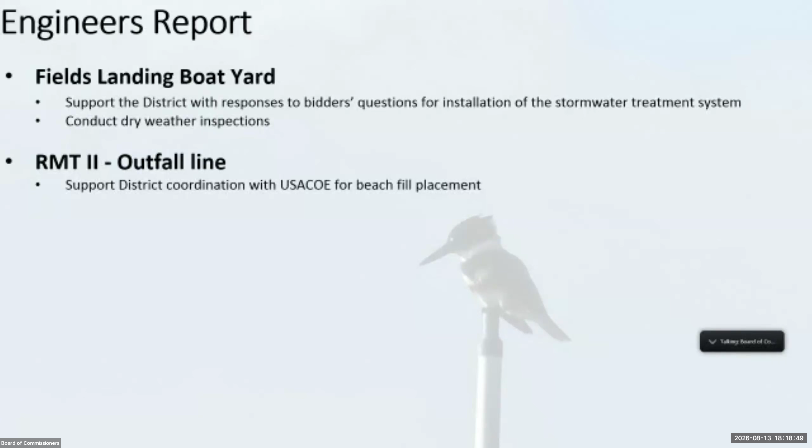And that material is sand. It's been found suitable for beneficial reuse and placement. So we've been working on a project with the Corps to see how we can use more of that material and perhaps consider direct beach placement. So more to come on that in the future. We're getting there. We're having a little technical bit here. There we go. RMT2 firewater.

So we're looking at alternatives for providing firewater flows out to the mill. You'll remember back, well, some of you will anyhow. Back in 2019, not all of you were on the commission back then. The state fire marshal had come to the area and said, "Hey, look, we need fire water on the Samoa Peninsula. We did not have fire water." And so we came up with a way to repressurize the system that was out there and expand services from Redwood Terminal 2 all the way up to the town of Samoa. Well, that is no longer necessary with the development in Samoa because they have their own water storage.

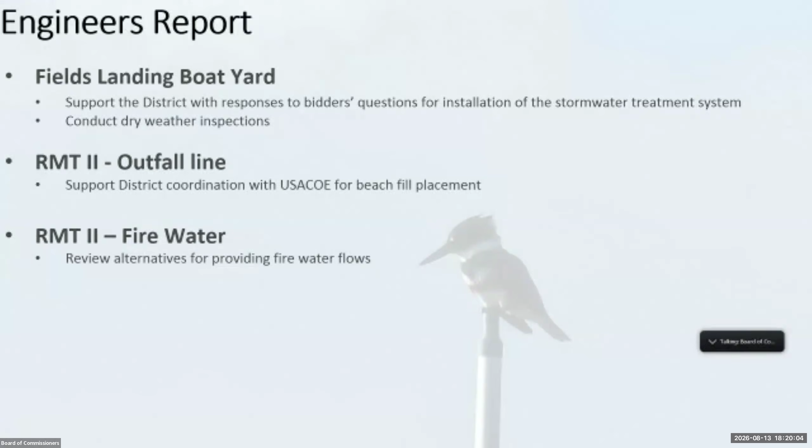The infrastructure that we were using for supply is failing faster than we can repair it due to its age. And so we're looking at alternatives to replace the current water tank, which is about 100,000 gallons. It's an elevated tower tank. That's one of the landmarks many people see out there. And we'd replace it with a ground level surface tank with a flow switch and electric pump to keep our fire system pressurized at Redwood Terminal 2.

Former LP Samoa solid waste site. So this is really just groundwater monitoring around the Samoa ash dump. And each year we have 2 monitoring sessions. We have an upcoming sampling session in August. Those numbers continue to look very good. We continue to stay in our post-closure status.

Shelter Cove, we recently received FEMA funding for the road. I don't know if I'm too far away tonight or why this mouse isn't working. We've been coordinating with Cal OES for boat launch access for road repairs. There's 3 repairs. There's the rebuilding of the breakwater. There's the road repairs. And then finally, there's a large scale debris removal project that we hoped would go first. So far, only the road has been funded. We received that funding just this past week. So we're working with SHN to see how we can commence studies and permitting there, and then ultimately move that project to construction.

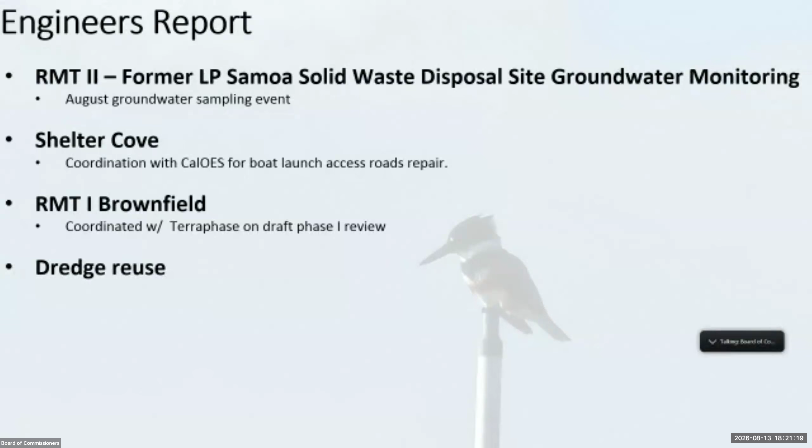Finally, RMT1 Brownfield, as part of the heavy lift main terminal, but outside of that, we had received funding to support the cleanup of the former Redwood Marine Terminal 1 and some neighboring properties for those landowners that have consented to be a part of it. We recently received the draft phase ones. They're in the review process to be finalized. They can be shared with the agencies and our technical committee to move towards the sampling and analysis plan.

And dredge reuse, we have a beneficial dredge reuse conference coming up that Rob was spearheading, and now we have Shelley from Moffatt & Nichol spearheading for us. That'll be coming up in October, and so Mike is helping support that and be part of that conference. And Vanessa's here to offer her report. It's pretty quick.

Just ongoing permit processing for Harbor District permit renewals, and then also received word that the Coastal Commission has accepted for filing as complete the renewal for the subtidal mariculture pre-permitting project. So their hearing date is pending. Staff is working on their staff report, but that is good news that that is moving forward and will go to the Coastal Commission soon.

Did meet with some Chevron dock representatives about improvements to their facility that they need to do next year. So pre-application meeting, talking about CEQA and other studies that will be needed to move that forward. And then, as Chris mentioned, we did go out to the lagoon site, the U.S. Fish and Wildlife Service and Humboldt RCD project out there.

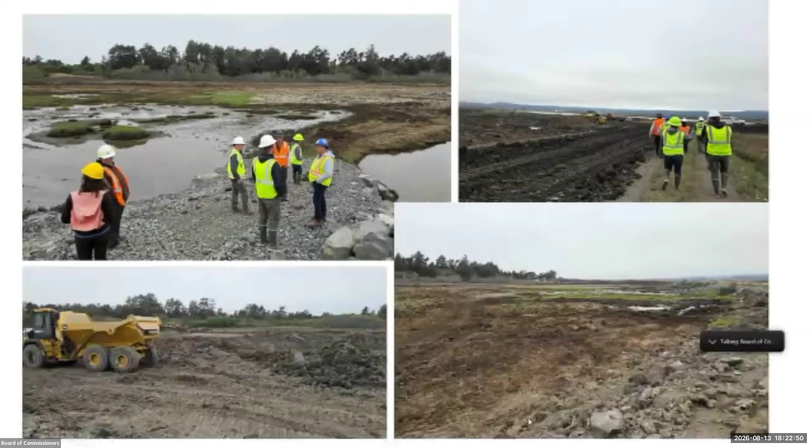So the next slide is just a few pictures. They are moving around a lot of dirt. It was fun to get out of the office and go see that. There were the adjacent property owners, and then Todd attended that as a tenant out there. And the Harbor District's role was really kind of to facilitate open communication.

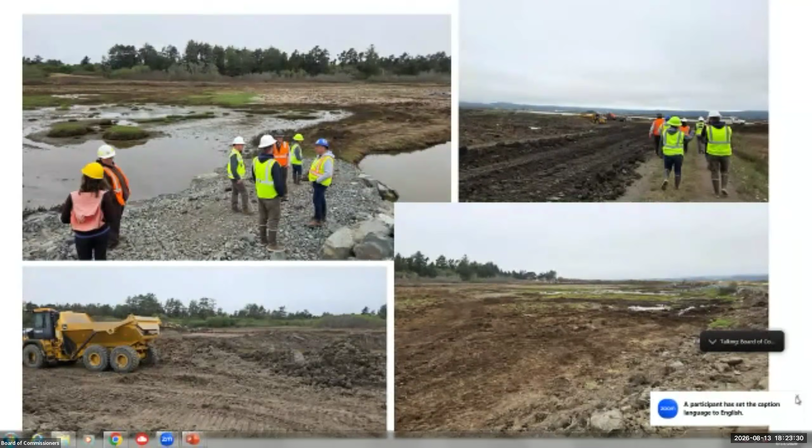We have been receiving weekly updates from the applicants and from the property owners, and there are some concerns. And so we are working to just talk those through and give as much support as we can to everyone, in terms of water quality sampling potentially, and then some debris removal out there; there's heavy equipment out there to try to get that done. And that's my report. Okay, thank you.

Okay, Commissioner and committee reports. President Coleman, do you have a report? Sure, thank you. First, I want to be sure to thank Rob so much for all his hard work and diligence and expertise that he's brought to the district. Our paths have crossed in many ways back to the Winzler and Kelly days, Rob, and I'm sure they'll continue to cross in future endeavors. I congratulate you on your new position. I know you'll do great, and they're lucky to have you.

And then wanted to also announce, I probably started seriously my engagement with Humboldt Bay back in 2009 in my role as Natural Resources Director for the Wiyot Tribe. In 2017, when Mike Wilson was elected to Board of Supervisors, I was appointed to this position. And so I've been serving, I'm on my 10th year now, and I made the decision not to file papers to run for another term. That was a tough decision. I've really treasured my time here, proud of a lot of the work that we've done, but needed to focus on some other things. My job, which is very climate driven, energy efficiency driven, and family things.

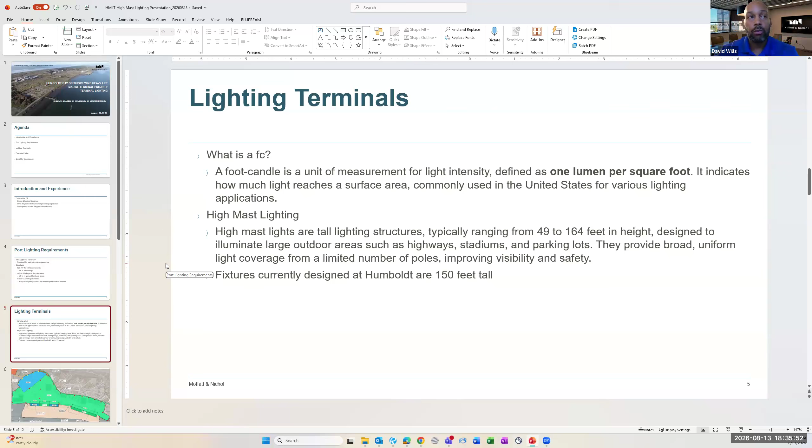Right now in Humboldt, we are planning on 150-foot tall fixtures. The tall fixtures allow us to push the light further and light the port from the perimeter. This is just a sketch - I'm still working on the lighting design. I just want to show how we're proposing to light the port.

We're still working on the design and going through the Dark Sky program, because I know the board is committed to that program. But we'll talk about those specifics in a little bit. So in general, though...

We are lighting the terminal from the perimeter, so that light will be shining towards the terminal itself, away from the perimeter, and that just minimizes light trespass. In general, the fixtures we're using are specifically designed to minimize glare.

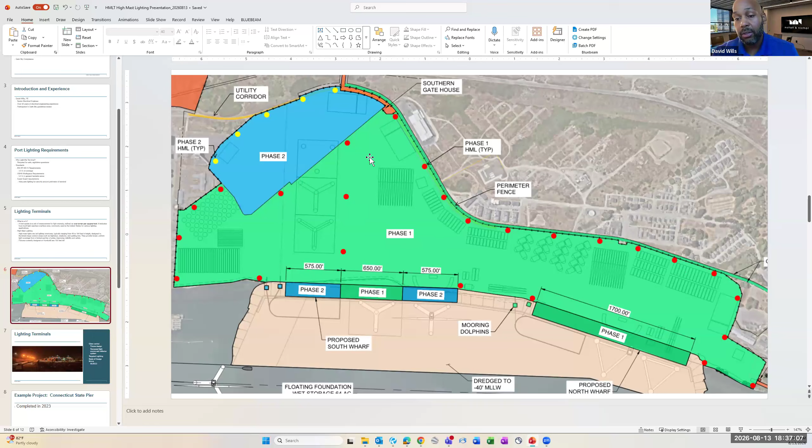I know glare is an important factor in general, and specifically for the dark sky program. We always try to minimize glare. I actually have an example of this from the IES RP 40-19 manual.

Working with manufacturers such as Musco, they design their fixtures in a way where the light source is recessed in the fixture, and it reflects the light source off of the housing. So you can't actually see the light source, you're just looking at recessed, reflected light.

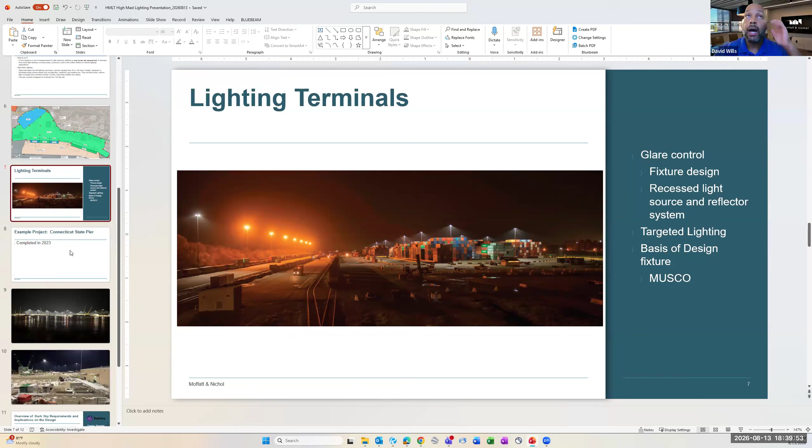I'll give an example before we talk about the Dark Sky program. I'll give an example of the Connecticut State Pier. I believe it's completed somewhere around 2023 or so. This program was actually completed before the Musco program, but you can see a similar look on these high mast lights, with minimized glare and the target light going down.

This is in New London, Connecticut. I'm standing across the water from it, and you'll see the town behind it. This picture here is taken from on terminal, so I'm physically on terminal when I took this photo. You can see the light levels here.

We shot for around 5-foot candles, and we have similar light levels. This was an operating night, so you see some of the equipment and the cranes. When we're operating we're at 5-foot candles, but normally we're much lower than that.

That leads me into dark sky compliance. Dark Sky is a program that's been around for a number of years. The port program is fairly new, they released their first guidelines in July 2025. The purpose of this program is to recognize port marine terminals that minimize light pollution, which includes sky glow, glare, and light trespass around the perimeter, while maintaining safe functional lighting based on the IES principles for responsible outdoor lighting. As part of that program, there are many things we have to meet.

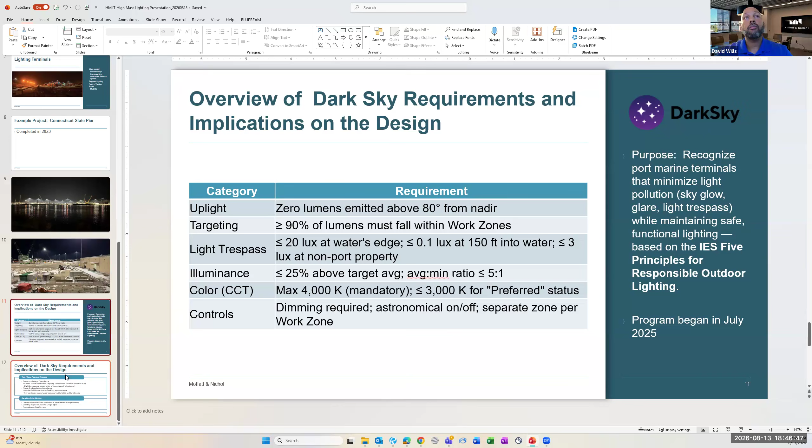Just a quick overview of the dark sky requirements, implications, and design—we'll have several phases, and it's not like we just say we're dark sky compliant. We have to first submit an online application, submit our lighting calcs to dark sky, our control schedule—how we're going to control the light—and there's a small fee for their review. So it's not just David Wills or Musco saying 'oh yeah, we're dark sky compliant'; the dark sky program reviews your design.

They'll give you comments. We may have to adjust our design based off the comments. That's all part of going through and making sure we're dark sky compliant. So they'll review it, and then once we've met their criteria, they'll issue us a letter of compliance. And then, it's not like with that letter of compliance, you're good.

No, there's actually, once the terminal is designed and built and constructed, there's an on-site field inspection. So a Dark Sky representative will come out to the field, and they will actually issue us a full certificate once they confirm we were meeting the requirements. And again, great benefits of it.

The primary benefit why we want to be Dark Sky compliant is community stakeholder validation, environmental responsibility. It's a way for the community, and for us and for the board who's concerned about it, to show that yes, we are responsible with the design of the light systems for this project. And then we will also get some labels and be able to say we're dark sky compliant. That's the end of my presentation.

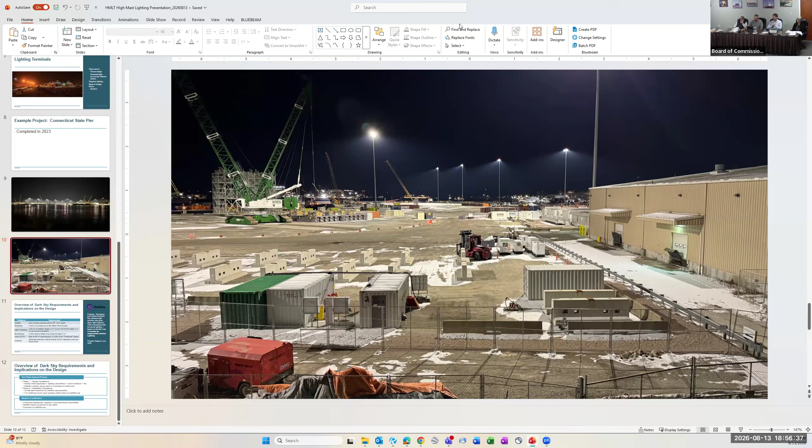Okay. Thank you. I'm going to take it back to, Rob, I have a question for you. I want to give the public a chance to comment. Is it best to see all the presentations and have a public comment period, or do you think it's worthwhile to have public comment per item? I'd probably defer that to our district counsel, but if you do comments for each presenter, are you allowing an individual to comment 3 times? Generally, it'd be after the end of all the presentations. Okay, well, we'll stick with that protocol. I just wanted to see.

Okay. Ready for the next then. All right, next up. Thank you so much, David. You're welcome. And David, there may be additional questions for you at the end of the other 2 presentations. Sounds good. I'll be here. All right. So our next one is about dredging. I believe Shelley's going to present, or no, she had a colleague. It may not have been Shelley that was presenting. Jon Finegold.

Okay, I was trying to unmute. I'll turn the camera on here as well. Do you guys let me?

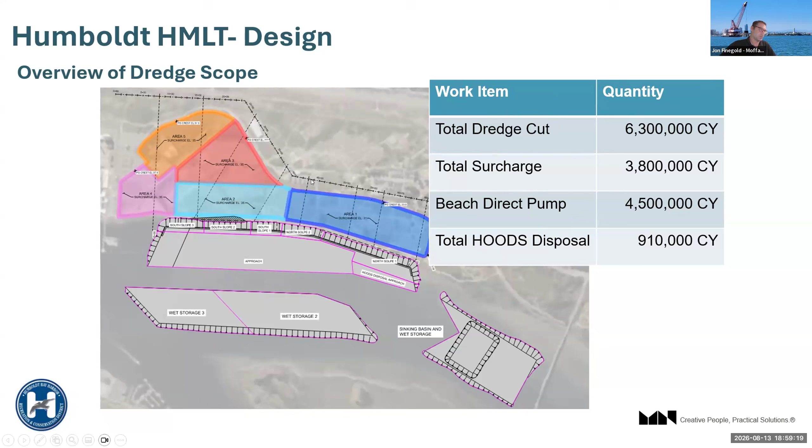So out of 6.3 million yards, 4.5 million directly go to the beach, and besides that, there's another 2 million that's going to be used for surcharge and then go to the beach after. But I'll go through that in the sequence. So before I get into the sequence, I just want to talk about the different types of dredges, just to get everybody in the room caught up.

So the first type of dredge I'm going to talk about is a clamshell dredge. It's a type of derrick barge. It just looks like a crane, but it basically has souped up winches and a way stronger boom and can move really fast. So you need stronger winches, because unlike a civil construction crane that's going to be hoisting lines with many parts, a dredge needs to use one line so it can go really fast, because time is money on a dredge. And if you're going to dig buckets all day, you just need that bucket cycle. You need that swing cycle to go as fast as possible. So that's what's different about a clamshell dredge than a regular derrick barge.

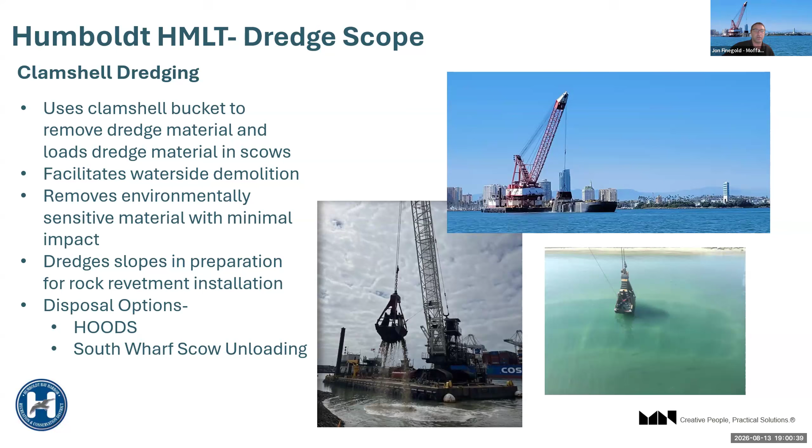They're really good for surgical type of work. So you see them working a lot around docks. They're great for demo. You can chew through an old timber dock just fine with one of these machines. And they're also good for long distance disposals because they load what we call a scow, which I'll get into a little more on the next slide, I think, or the one after that. And another thing a clamshell dredge is really good for when you're dealing with demolition is sifting through debris. It's better suited than any other dredge type for that.

And the main tool for that is shown here on this slide. We call them grids or grizzlies, and those will sit on top of the scow. A big grid, very heavy steel, usually spaced 1 foot by 1 foot, and you can separate rocks and demolition debris from your dredge material, mud or sand. Which is a useful tool in a lot of these projects, particularly ones that contain demolition in ports.

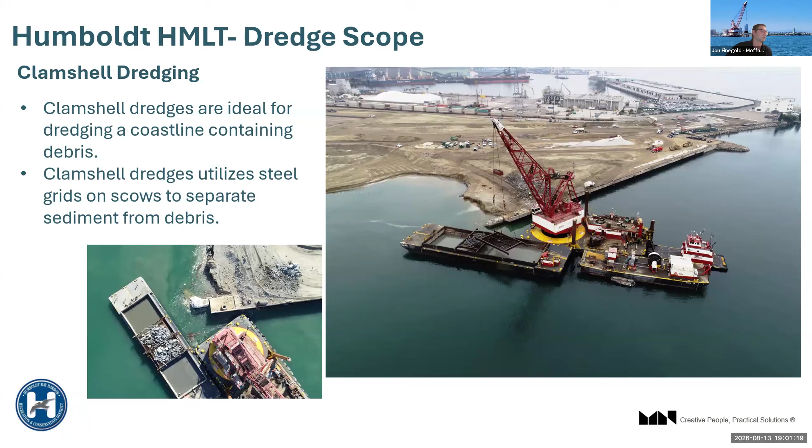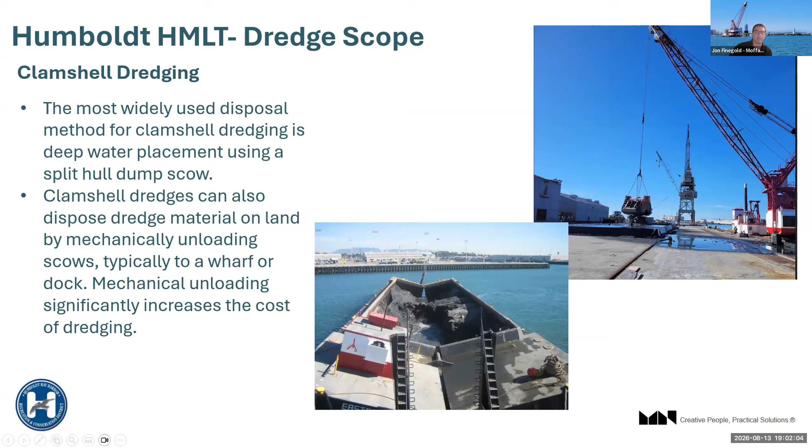We do this quite a bit to build ports out of water. Here in Long Beach, we build land from places that were once ocean. And this is the method we use to compress that dredged material and make it suitable so that you can put shipping containers and cargo on top of it, and it can hold cranes.

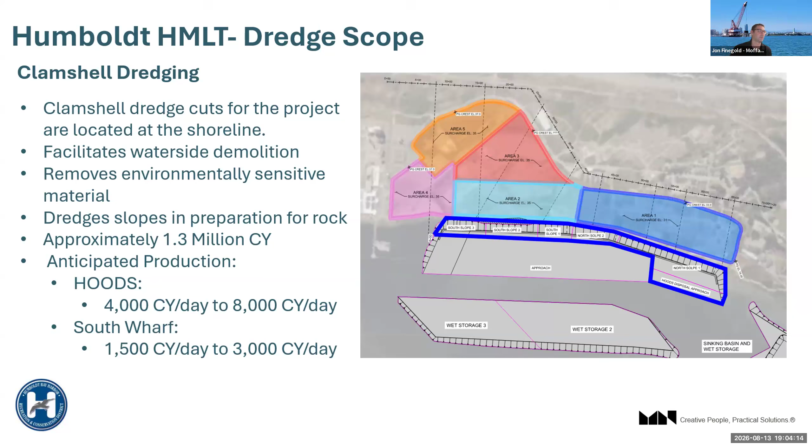That blue outline is what I was trying to highlight in this slide, and that's just showing you all the places that get dredged on this project. That's the area that's going to be best for clamshell dredging. Thank you. No problem, Rob. Thank you.

All right, and the next dredge type we're going to talk about is a cutter suction dredge. These are bigger, they're faster, and because they're so productive and dig so fast, they're going to be quite a bit cheaper per cubic yard when you're digging bulk quantities. So we like to use these dredges out in the open. They can pump a couple miles through that pipeline that you see in the back of that dredge.

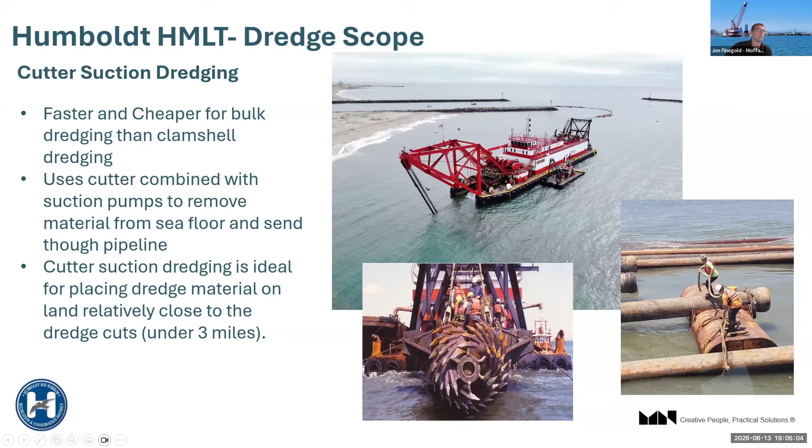And these dredges are typically used to make land, like I was talking about in the port, or to build beaches, or to clear channels as well. And they can pump about 3 miles, or this one can. They come in all sizes. This is the biggest one on the West Coast. As you can tell, I worked with this dredge for a long time, and have a lot of pictures.

So the picture up top is from the Port of Long Beach, and that was a landfill project where we were making land out of ocean. You can see in the top right that that's the area that was being filled. And in the middle of this picture, you can see the dredge working around a bunch of other equipment on that project.

And these other two pictures just show what the discharge end looks like. It's a lot of material moving out of that pipeline, and there's a full crew of what we call yellow equipment, bulldozers and loaders that are tending that pipe and shaping that discharge as it comes out of the pipeline.

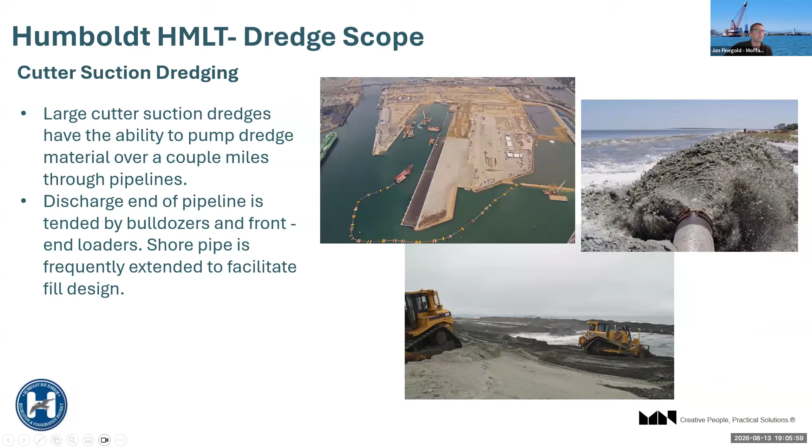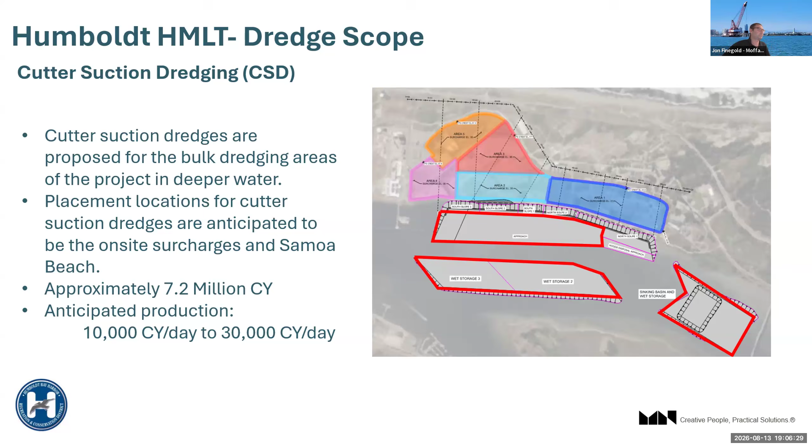And then back to our project. What I'm showing here is the areas we anticipate for cutter suction dredging. It's basically that big section of the approach into the wharf, and then the wet storage areas and the sinking basin. So the majority of the project. And those are the areas outlined in red. Correct. Those are the red areas. All right. Well, if there's no questions on the dredges, I'm going to go ahead and get into the plan we've come up with.

So in year one, we would have a clamshell dredge working, digging those two areas in blue I have outlined, and then we're going to have the cutter suction dredge start in that red outline area, part of the approach. And we would have them start filling that first surcharge area. That's about 1 million cubic yards in what we understand is going to be the 3 month season where a cutter suction dredge could work. 1 million cubic yards is what we would expect they could accomplish in that season. So that's how we size these surcharge areas.

And when you build a surcharge, you surround it with dikes, and you have a weir system to drain the water that's coming off. That way, when this material comes out at high velocity out of this pipeline, it has a lot of space to settle out, and the water leaves the site.

So the idea is, in the interest of getting this thing built, getting as much surcharge down as you can the first year you can show up with a cutter suction dredge. And that year, of course, there's plenty to do for the clamshell. They work a little slower. The main goal that year is going to be digging out what I call South Slope 2, right in front of Area 2 there. And I'll tell you why in a minute.

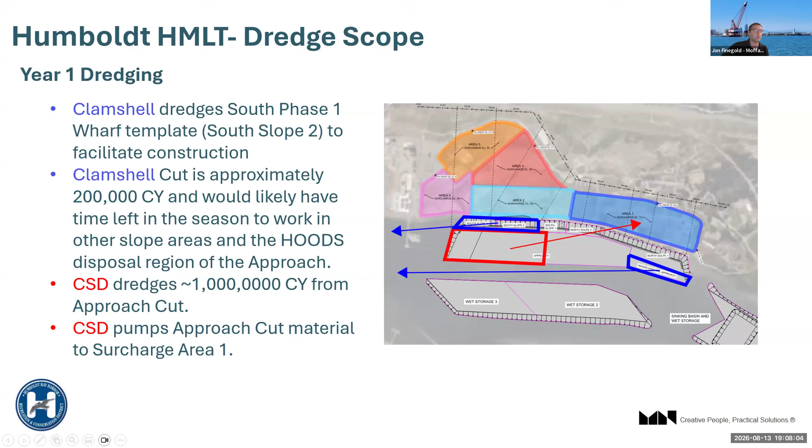So year 2 dredging, there's a potential that some of this material in the North Slope 1 area, in the clamshell area, under the existing dock, will not be able to go to the ocean disposal site. If that is the case, we will have built a dock here at the South Slope area where we'll unload it to land.

It's not harmful or dirty or anything like that. There's just a lot of regulation about what can be disposed offshore, and we just haven't run the tests yet to understand whether or not all this material can go there. So the idea is to get that South Slope 2 area to have a functioning wharf there, and then this material from the North Slope 1 area can be offloaded there. That also facilitates the demolition of the old timber wharf.

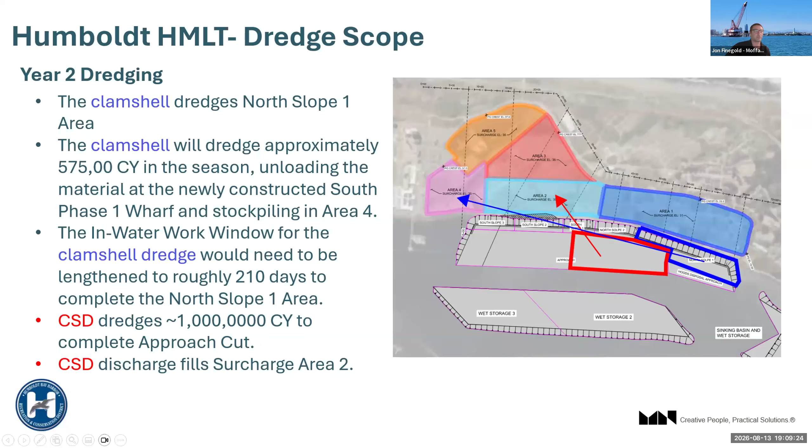Meanwhile, the cutter suction dredge comes back in the second season, and it'll start filling up surcharge area 2, which is about 1 million yards, maybe a little less, maybe more like 800,000 for that one. Then year 3, we just kind of keep moving through the site. The clamshell dredge is going to continue to dig to complete slope sections to prepare the slope for the construction.

The cutter suction dredge is going to move to the wet storage areas where the bulk of the material is on the project. And at this point, the cutter suction dredge is just going to pump all that material straight to the beach for beneficial reuse. On land, surcharge area 1 has sat for a year, which is what we anticipate will be required to get the settlement we're looking for. And then that material gets pushed into surcharge area 3.

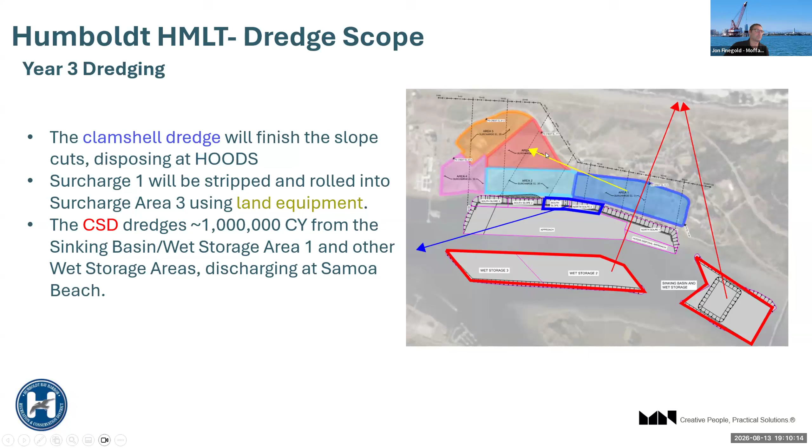And then years 4 through 7, very similar. The cutter suction dredge just kind of keeps moving through these big wet storage areas to dig these out, send that material to the beach because our soil testing program has indicated it's beautiful beach sand down there, and the surcharges get pushed along through these areas, and then as they're done surcharging the various surcharge areas to get the settlement we want, that gets pushed to the beach as well.

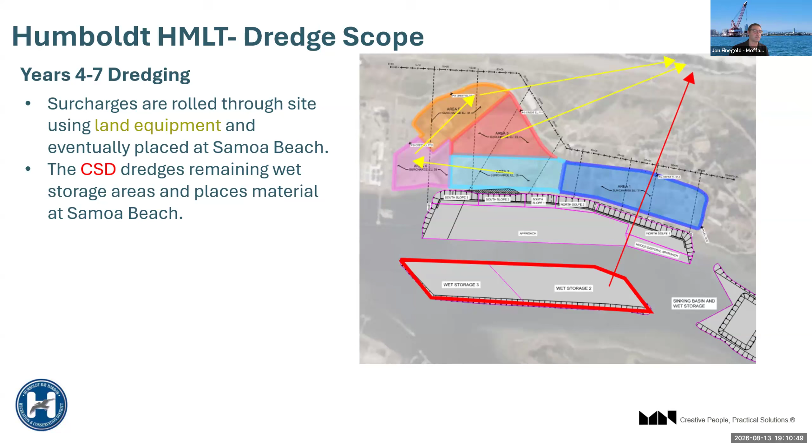All right, should we take questions now? Yeah, thank you so much. I'm sure there's a lot of questions because there's a lot of detail that you didn't go into. Let me start with some of my questions first.

The clamshell and cutter suction dredging: which type of dredging minimizes turbidity in the bay in general? And what kind of BMPs? I didn't see best management practices in terms of booms with silt curtains, anything to contain the turbidity, whichever way the tide is going, whether it's slack tide or incoming or outgoing tide. We're really concerned about water quality and not exporting turbidity off site. Are there BMPs that are going to help with that, or do you have other slides that could show us what that looks like?

Yes, there are. I don't have anything prepared to show you. But specifically when you're using the clamshell dredge, it's achievable to wrap that operation in silt curtain, and that can help quite a bit. As far as the cutter suction dredge, the main BMP you use is you control the water that flows back out of the fill site with a weir system. And I could prepare you some sketches of that at a later time to show you exactly how that works. Yeah, at some point we'll want to really dig into the details. I realize we didn't give you 2 hours to go into that level of detail.

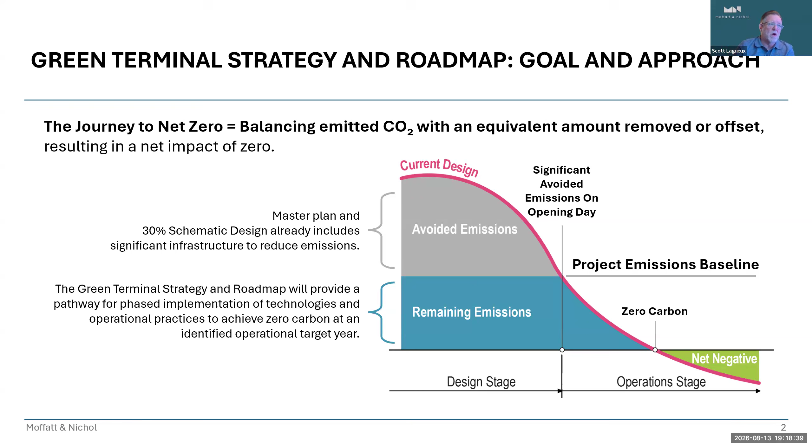We've been doing that across 3 main tasks. First, and where we were able to get in our work last year, is to model the emissions for the current project design. Since the restart, we've been working to update that model based on some small changes and tweaks to overall project delivery times and some components. We really want to make sure we understand where the emissions are coming from and in what quantities, of course, as we're looking at the present design.

And then second, we're developing and evaluating different decarbonization pathways, intended to get us to zero carbon over time. And then finally, we're putting all that together into a practical green terminal strategy and roadmap, one that shows how we can move towards net zero, making sure we do that in an easy, understandable document with lots of graphics, infographics, and visuals so that it is highly able to convey the ideas, thoughts, and components to grant agencies, the public at large, and decision makers in a really good synopsis.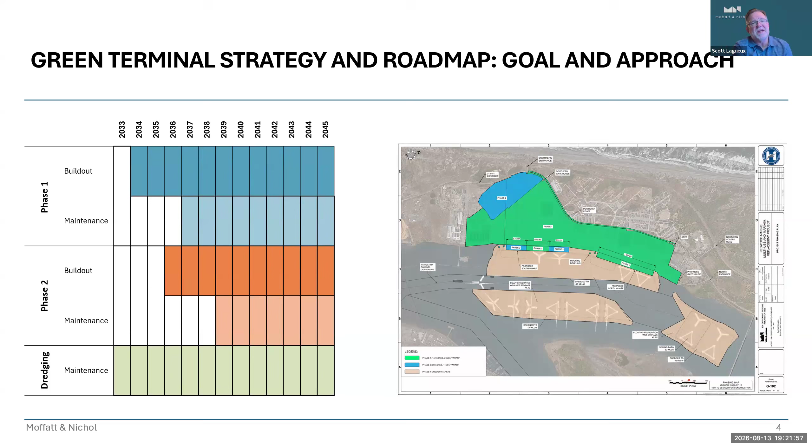The landside equipment is crawler cranes, wet storage generators, delivery vehicles, and all sorts of other components associated with the overall operation. It's important to note that the current design is considered sort of a best-in-class type of facility for its type. You already have in the design extensive electrification of in-yard equipment, vehicles, forklifts, those types of elements that are doing the smaller tasks in the port.

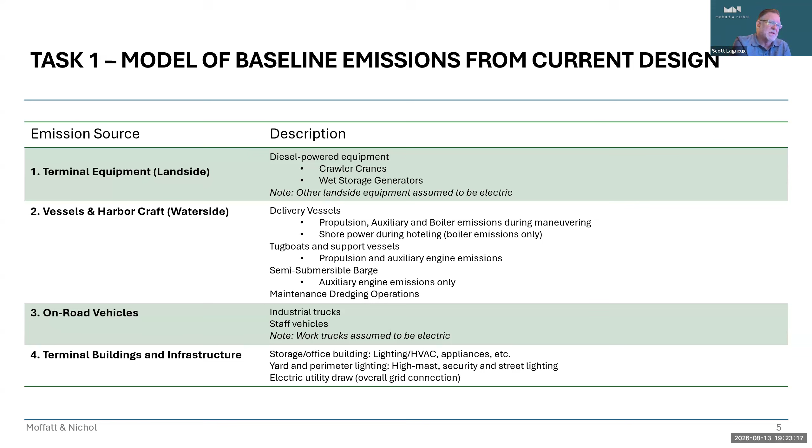You have shore power systems that are linking vessels to the berths. You have site solar and other emissions reducing features that are built into the mix and built into the current design. And of course, all of those are layered into the model and the analysis work that has been done up to this date.

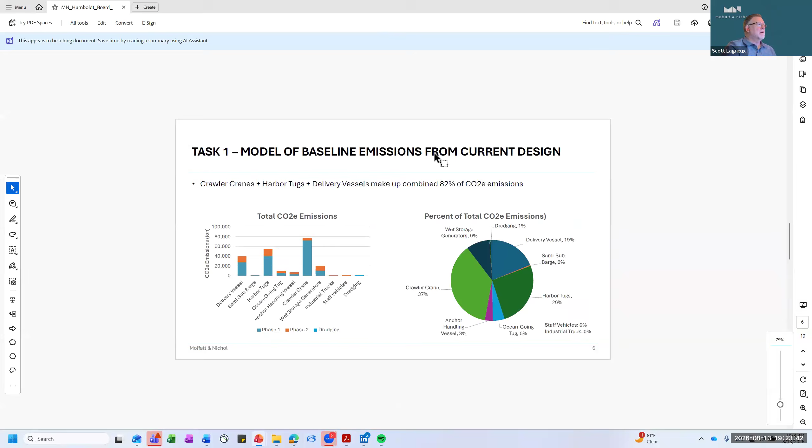I am not sure where the rest of that slide seems to have gone. That's strange, let me see here. That's very odd. Let's show that again here. Okay, so now I've kind of shifted. Hopefully you can see the PDF, because I'm not sure what happened to the PowerPoint.

Shown on this slide is the completed baseline emissions model work. Building the model involved taking all the equipment and components, understanding their emissions and ratings, and then doing the forecasting associated with that over time. This is a model that we continue to perfect. We've circulated this baseline analysis to the advisory committee, and we continue to make small changes and tweaks to it as things are finalized in the design itself.

I think most importantly, the key finding from the baseline analysis is that activities from three main sources, the crawler cranes, the harbor tugs, and the delivery vessels, account for almost 82% of modeled CO2 emissions over the analysis period out to 2045.

Crawler cranes are the largest source of emissions, about a third, roughly 37%, followed by harbor tugs at 26%, and in-water delivery vessels at 19%. When we can clearly identify 82% of emissions coming from three sources, it's only logical that that's where we focus our decarbonization scenarios, tackling those biggest emission sources as best we are able to push down towards our zero carbon effort.

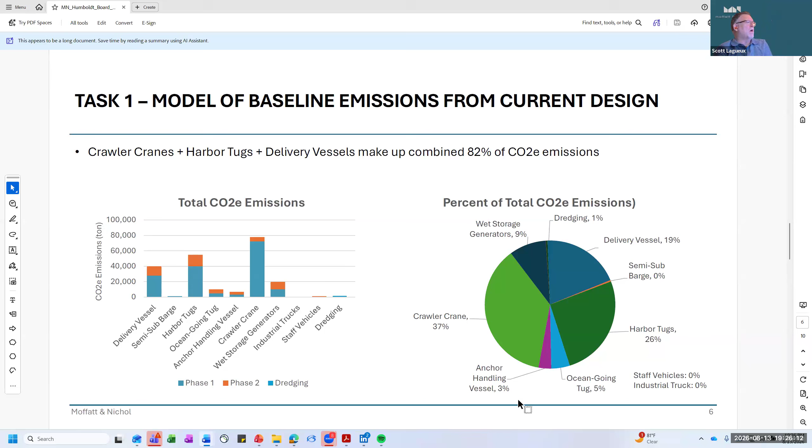I know we're kind of focused on CO2, but the analysis and the model does output results from nitrogen oxides, NOx, sulfur oxides, SOx, particulate matter, methane, and other key greenhouse gas components and measurements that are important to really understand where we are and how we can better the overall project.

Following the baseline analysis, we've also started to move into decarbonization strategies. Here, we're evaluating two strategies for reducing emissions, focusing on those big three: the crawler cranes, the harbor tugs, and the delivery vessels.

The first scenario focuses on what we call low to moderate risk decarb measures and operational practices, and the second looks at more moderate to high risk measures. When we refer to low to moderate versus moderate to high scenarios, what we're really talking about are different levels of risk and ambition in the decarbonization pathway.

We're looking at factors such as technology readiness and availability, operational flexibility, infrastructure requirements, cost, implementation timing, and other features to have a more holistic understanding of each component as listed in their respective rows and columns. So, for example, we're looking at equipment in water and landside, its ultimate electrification or hybrid activity, such as hybrid or electric crawler cranes, alternative fuel tugs, battery systems, hydrogen-ready vessels, and other things across this low to medium or medium-high range of scenarios.

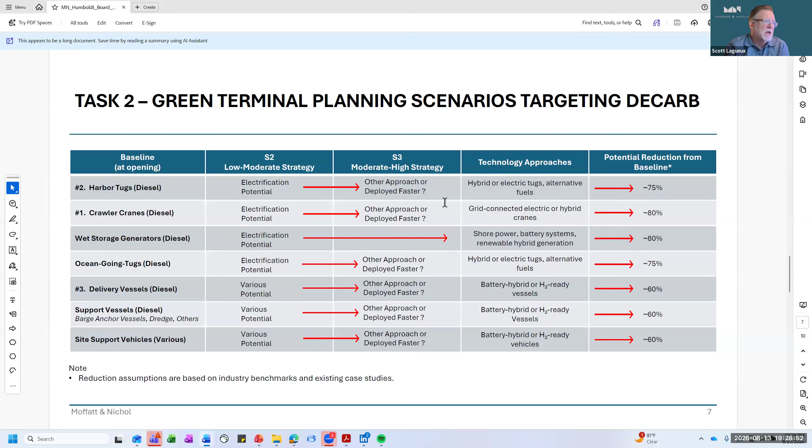We're not just locked into any one particular column. It's not like we can only do baseline, or only the first scenario, or only the second scenario. There's no exclusivity, but what we expect is the plan and ultimate roadmap will have flexibility to pick and choose from each of those columns where it makes the most sense based on overall objectives, infrastructure availability, cost, or implementation timing, to hopefully get as close as we can to zero carbon, and then make recommendations on how to squeeze that last little bit out of the process to get to the ultimate goal.

We are, of course, looking at those big three. We're looking at everything that is going to help us squeeze out and get rid of emissions over time as we implement the project to get to that goal of zero carbon. But clearly, understanding that 82% is super important.

This slide just gives you one example of how we're looking at a high level of each of the assets and the technological readiness of these assets as they currently exist.

For example, electric crawler cranes are emerging as a promising option, but they require a lot of specialized charging infrastructure. There's also the possibility of hydrogen powered cranes, which may offer even greater flexibility, but there's a supply issue. As we evaluate these technologies, our goal is to encourage and enable port and equipment operators to adopt some of these cleaner equipment options over time, while maintaining flexibility as the market evolves.

We also have to recognize, and we'll give strong data and understanding as to many of these specialized equipment types, that they're just not available in large quantities. In some cases, they're very much in their infancy, and not readily available today. In some cases, we're looking at the mid 2030s before we could see a number of them available to the degree that we could see that on site here in Humboldt.

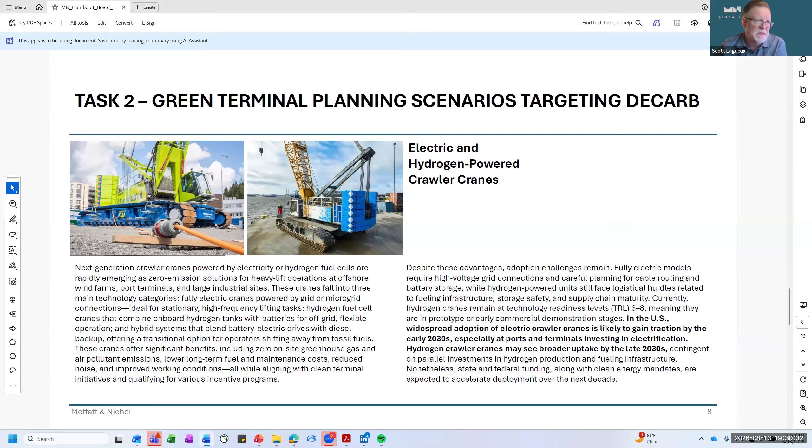And we're going to give some good direction on that as well. And then finally, it of course is the roadmap. We've already started sort of authoring the roadmap and the end product as I described. We really want to make sure it's clear and it's practical, that it's highly visual, and we'll take the emissions analysis, the technological options, the implementation considerations, and turn those into, as I mentioned, a phased strategy, taking from each of those columns, the baseline, the low to moderate, and the moderate high different approaches, and give a clear picture

of the actions and how those actions could occur over time, what they might cost, where there's flexibility built into the system, and how we can get the biggest bang for our buck, especially focusing on that 82% right out of the gate to get us towards that zero carbon terminal and future that we desire. I expect this document will be 20 to possibly 30 pages in length, and we'll have an almost poster-sized graphic of the overall project with infographics talking about specific elements as to emissions today and where we expect emissions to be in the future based on some of the components as well.

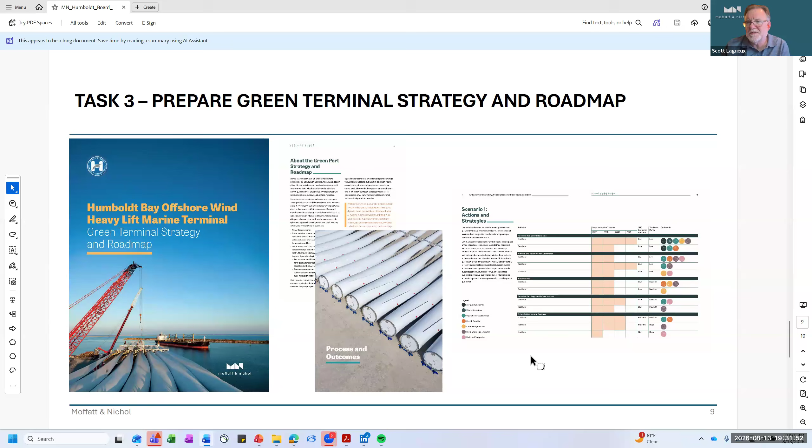That concludes my update. The expectation is, we're here, of course, in mid-August. We're making really good strides on the work product in each one of those three tasks. We're on a little bit of a pause with working with the advisory committee as the committee structure overall is being assessed, but we're really looking forward to re-engaging with them at the appropriate time to move them through and get their important feedback as to the work product and the ultimate roadmap. And with that, I'll turn it back to the board for questions.

Thank you so much, Scott. That was super informative. It was really great to get some sense of the roadmap and of those areas, the different sectors in which you'll be looking at it. Here, my overarching question is this: it seems like what we've scoped you to do is to really look at how we can work towards a zero emission port. What's that journey like? And mostly the greenhouse gases, methanes, NOx, SOx, et cetera, from our particular site in the time that we use it.

I guess I'm curious, is this report going to include, or did we include in your scope, talking more about cradle to grave of, let's just take batteries. Just the fact that we're using a battery, is it all positive points that we've reduced emission, or are we looking at the mining to get lithium to create the batteries, to bring them here, how we use them, how they get recycled or repurposed or finally disposed of? Are we looking at cradle to grave kind of scenarios with the materials here, or are we just looking at, once they're in our hands, what we do with them on site?